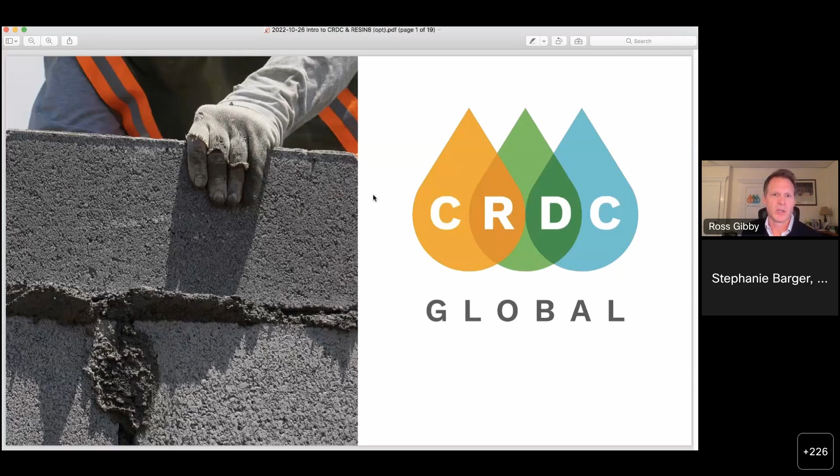Our mission, and what we actually like to call our call to action, is to create appreciating value from the world's plastic waste. And when I say world's plastic waste, we actually mean it, because our process can accept all 7 resin types. Resins 1 through 7, the triangle on the bottom of plastic packaging, the number inside, we can take all 7 resin types, and we can take contaminated, mixed polymers, etc. But I'm actually getting ahead of myself.

A lot of those resin types are not recycled at this point, so they are considered low or no value. And we're actually converting them into a building material for concrete, which not only provides value to the concrete itself, but when it goes into buildings, let's say affordable housing projects or commercial buildings, those structures actually appreciate in value over time.

So we're taking a waste stream that currently has low or no value, and we're converting it into something that not only has value in the present, but will appreciate in value in the future. And when we do that, not only are we creating an environmental benefit by diverting massive quantities of plastic waste from landfill or from incineration through waste to energy or even informal burning.

Not only are we creating that environmental benefit, we're also creating the economic benefits all along that value chain, providing jobs, providing businesses like the concrete companies, like construction companies, profitable ways to take advantage of this waste stream. And that also provides social value.

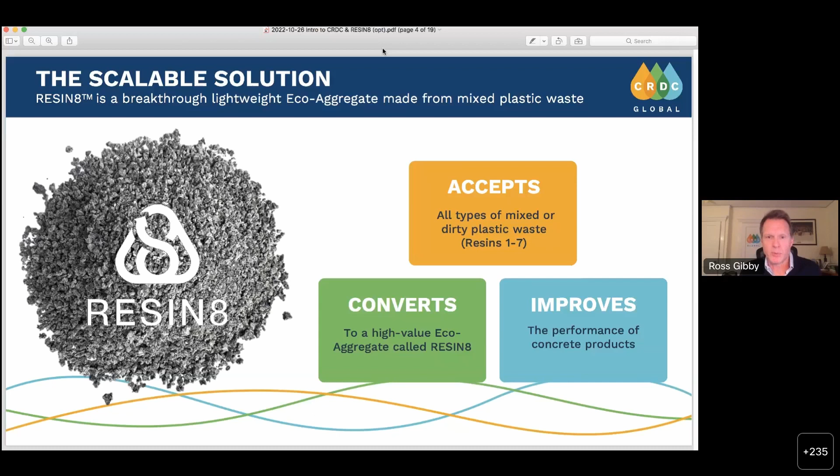It may have organics like slime or algae associated with it. If it came out of a municipal waste stream and it has food associated with it, or if it has paper labels, we can accept all of that. So we're very flexible on the front end in terms of what we can accept. You name it. I mean, we're basically getting car bumpers, kayaks, plastic lawn chairs, etc. But we convert it into this material called Resin8, which actually improves the performance of concrete products.

So how does it improve the performance of concrete products? Donald Thompson, our founder, CEO, and the developer of this technology, came from the concrete industry. He came from the construction industry and knew that in order for, let's say, an aggregate made from plastic waste to be adopted at scale by the industry, which is the only way you're going to absorb the massive quantities of plastic waste, it couldn't just be landfill in disguise. We couldn't just be hiding plastic waste in concrete. It would not be accepted by the industry.

People have been trying to put plastic into concrete for quite some time, probably about 10 years now. Unfortunately, plastic in its natural form is hydrophobic; it repels water. So it automatically repels cement when it goes into a concrete product. So it immediately lowers the strength and lowers the structural integrity. And so it would not be adopted at scale by the construction industry if it did not maintain strength, first and foremost. You might have some niche applications like park benches or concrete countertops, but it had to maintain strength in order to get into all of those structural applications that are predominant in the concrete and construction industry.

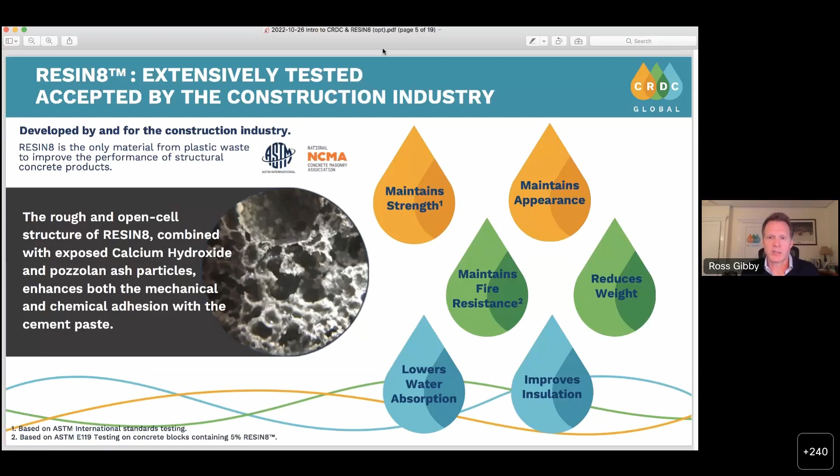Resin8 has an R value 3 times higher than sand, what it replaces. Now, we don't replace 1-to-1. We replace smaller percentages of that sand with Resin8, but when it goes into a concrete product, what we've seen is improvements of about 20% of the R value. So when you put Resin8, let's say concrete block, into a building, it actually reduces energy usage of that building over time.

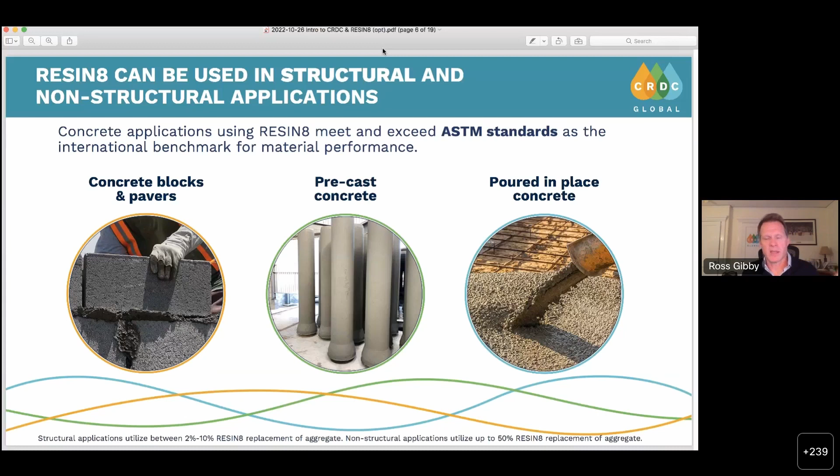Those are used by one of our concrete partners in Cape Town, South Africa, where we have a small scale Resin8 facility. And then you have poured in place or ready mix concrete, what we all know as the big cement mix trucks that you see driving down the highway. So ready mix concrete as well is another application. And our new product that does have the carbon capture technology is much more applicable to ready mix, and I'll talk about that in a minute.

So obviously we have these environmental benefits. We're diverting plastic from landfill and incineration, because most MRFs, most material recovery facilities, are really only focused on 1s and 2s. Occasionally, they're looking at 5s, polypropylene as well, but there's massive quantities of plastic that's not even being run through municipal waste streams or recycling streams. That's currently just going directly into landfill. We're also reducing the energy usage of buildings over time.

And one thing that a lot of people don't realize is that concrete is actually recyclable. At its end of life, let's say in 80 to 100 years, when a building gets torn down, that concrete gets crushed up into rubble, and it will be reutilized as aggregate in the next version of concrete. So what we're doing here is we're taking the plastic out of a plastic recycling stream, which may have an event horizon of 3 months or so. And the likelihood that something will go around 3 times is very, very small. In fact, less than 0.5%.

And we're converting it. And as Stephanie said, we're transforming that plastic into a material that then goes into a concrete recycling loop, which has an event horizon of 50, 80, 100 years, and then can go on in perpetuity. So we're essentially giving this plastic waste an environmentally benign end of life solution.

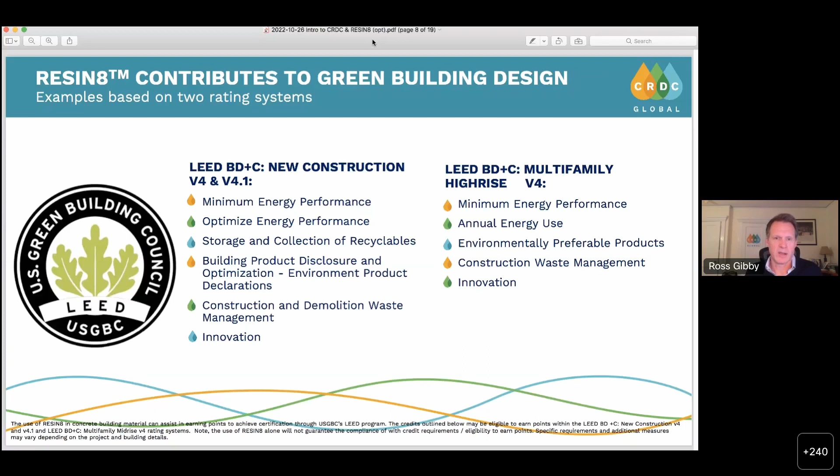I talked about it earlier. We don't want to be shipping plastic very far. We can actually get all the plastic we need in a very local geographic area. We'll convert it in that geographic area, and then we'll put it into concrete and construction projects in that area. So that'll be about 1.5 tons per hour. We're currently using that facility now.

And the reason that we chose York, Pennsylvania is because we wanted to use it to seed the market. Essentially York has access to Baltimore and Washington, D.C., and Philadelphia and Pittsburgh and Harrisburg and all the other mid-sized cities in Pennsylvania and Delaware and New Jersey and New York City. So it's basically our pilot commercial facility in the United States, but we envision about 50 to 75 locations expanding across the U.S.

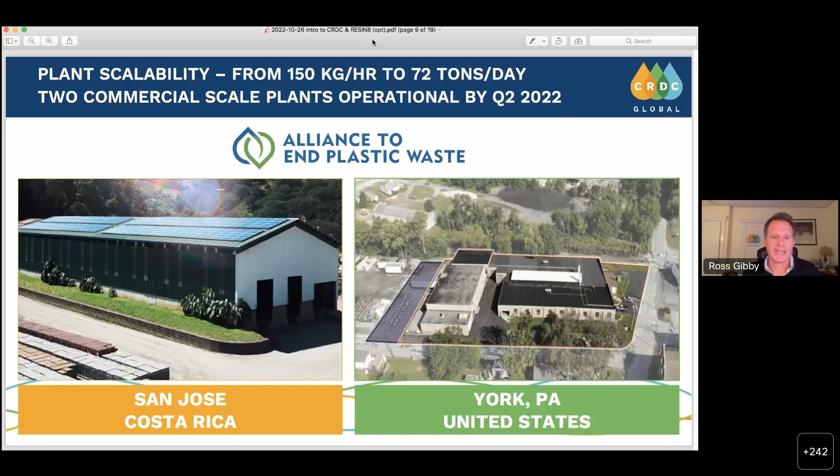So a RESIN8 solution and a RESIN8 plant, which matches the population center, matches the waste stream, matches the demand for construction in that area, can be suited to that particular region. And we're seeing a lot of attention from the ocean conservation communities and from the island nations because of this. We're also moving forward on locations in Curacao, in Jamaica, Dominican Republic, the Philippines, Maui. So this has gotten a lot of traction because of its scalability and adaptability of our facilities.

But we do also work with the plastic producers. We're finding that they finally are starting to take responsibility for the end of life of their product. They will probably be mandated to do so in the future with EPRs, extended producer responsibilities. But we do work with Dow, we do work with Braskem, we do work with those groups in order to help them figure out how to have an environmentally friendly end of life to their plastic waste.

But we also do work with construction companies. Pedregal is our largest partner in Costa Rica. They are the largest concrete and construction company there, virtually a monopoly. Martin & East is a construction company in South Africa. Georgia Pacific is actually our plastic waste manager and supplier in the United States. But we're also working with these big international organizations like the United Nations Development Program. They're actually taking the lead on our project in Samoa, and Habitat for Humanity.

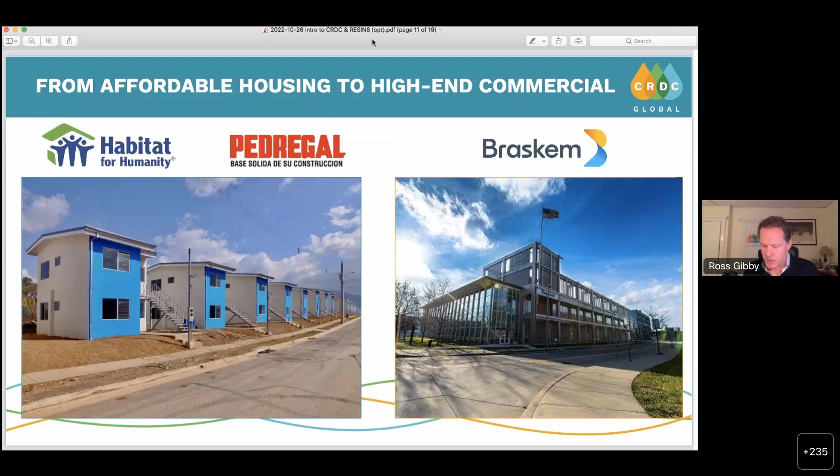Our product can also go into asphalt. So we've talked a lot about concrete up to this point. When it goes into asphalt, it works a little different because it melts into asphalt, and therefore it acts less like an aggregate, like a rock or a stone that acts as a filler, and more like the bitumen or the glue that holds the asphalt together.

But what you see on the left side there is a test in Costa Rica. It's about a 4-kilometer test on the most traveled route in Costa Rica, which is Route 27 from San Jose to the coast. And that was in conjunction with a Spanish company called Globalvia. Those tests have just recently concluded, and a third-party lab has written a white paper on those test results.

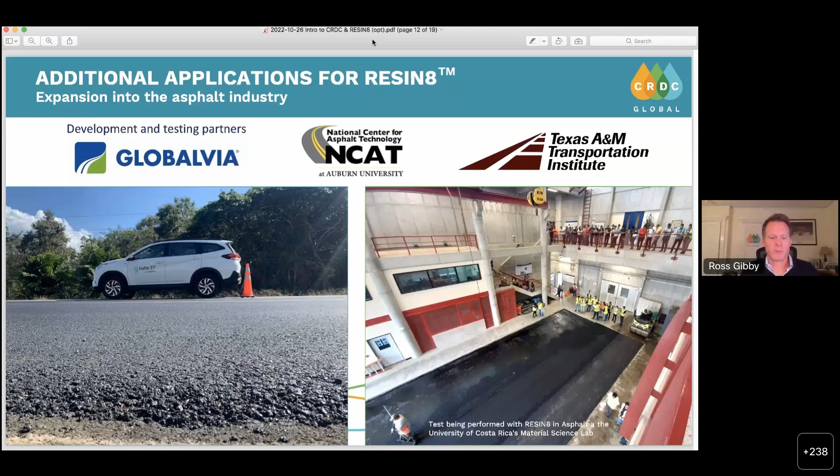So we are getting a lot more traction in asphalt as of late. However, concrete and building projects are our priority because, as I mentioned, we do prefer for the material to go into something that actually has appreciating value. So this is what I mentioned and alluded to earlier. A press release just came out this morning, a formal press release announcing this new technology.

What this is: we take the original core RESIN8 particle, which does have that open cell structure, which kind of absorbs material. And we take that and we batter it with a cement paste and expose it to an emission source. In certain cases, it's literally just an emission source out of a vehicle, a truck or a car. And it absorbs the CO2. The calcium hydroxide in the cement paste absorbs CO2 and converts it into calcium carbonate. Calcium carbonate is literally just limestone.

So what happens is it creates a limestone shell around the outside of the core RESIN8 particle. And we also add some nylon fiber reinforcement there. It's basically hot and active initially when the reaction happens with CO2. And we put that into ready-mix concrete, poured in place concrete, and it has incredible value. Not only does it accelerate curing through carbonation rather than hydration, but it increases strength.

When it increases strength, it allows us to reduce the amount of cement used in that concrete mix. And you may know that cement has a very high carbon footprint, and it's also very expensive. So we can not only absorb and sequester CO2 with the particles themselves, but then we can use it to reduce the amount of cement used, which further reduces the carbon footprint.

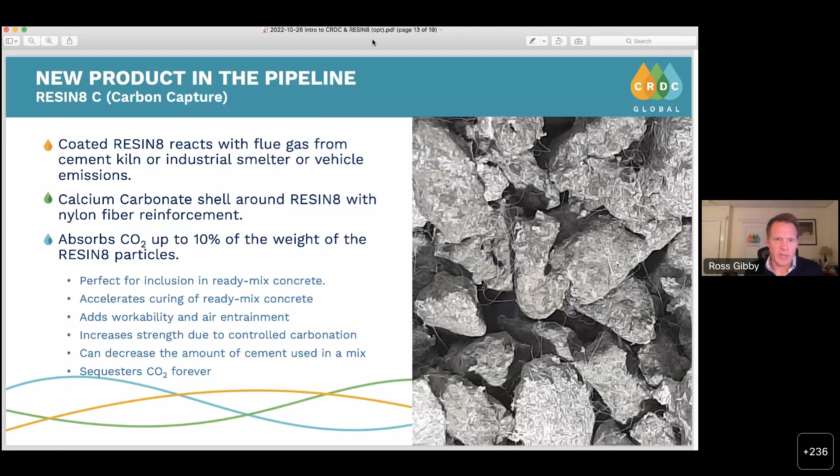So real quick, I see Stephanie jumping up there. I got 1 minute.

Okay, so real quick, 3 of our waste streams are industrial, environmental, municipal. The municipal waste stream is the most challenging for us because when our material comes to us from the MRF, all the clean stuff's been pulled out for recycling and it's the residual stuff. But unfortunately, the residuals are mixed in with the aluminum, the glass, the paper, etc. So it can't be extracted.

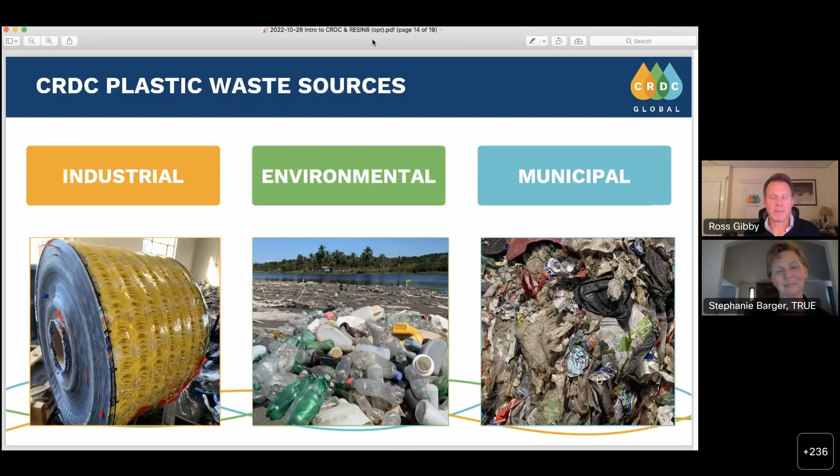So we've actually created our own collection and recovery program called the Bag That Builds. And it's super simple. All plastic goes into one bag and it will be zero waste. We guarantee none of that will end up in the environment. It won't go to landfill, it won't be burned, and it won't be leaked into the rivers or the oceans.

And what we're able to do is actually pull some of those clean ones and twos out of that waste stream. We sell those back into a recycling loop. We run that revenue stream through a foundation, and then we donate that money towards, let's say, additional beach cleanups or additional river cleanups, or we pay towards transportation of the material to us. So the ones and twos get pulled out, generate a revenue stream that goes to foundational purposes, and the rest just flows right back into RESIN8.

This program has gotten wide acceptance everywhere we are right now. The bags are being distributed through schools in Costa Rica and Samoa and Cape Town, South Africa. In the US, in York, Pennsylvania, they're being distributed through community organizations like the Rotary Club and the churches and the Garden Club and the Audubon Society and senior communities. And this has just kind of taken off.